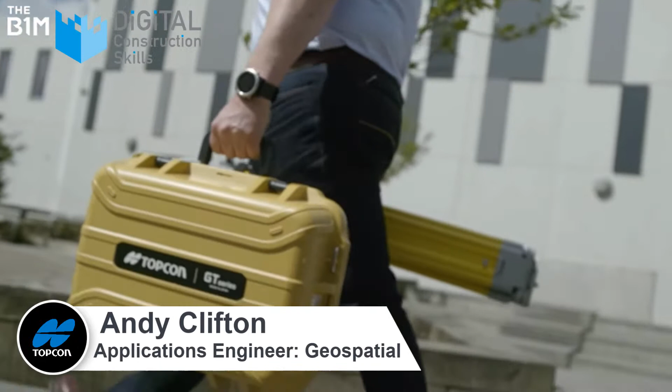Hi, my name is Andy Clifton and I work as an applications engineer for Topcon Positioning in the UK, and I'd like to talk with you today about digital transformation in construction.

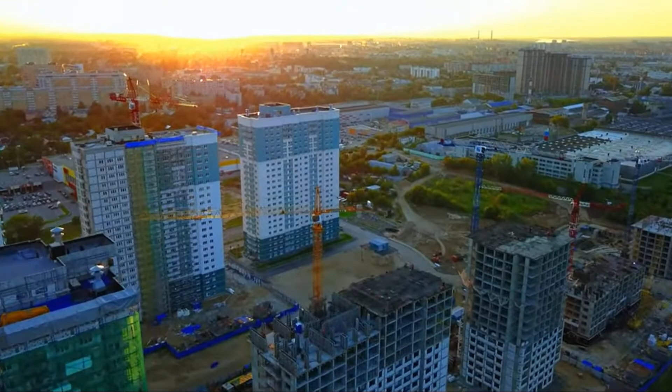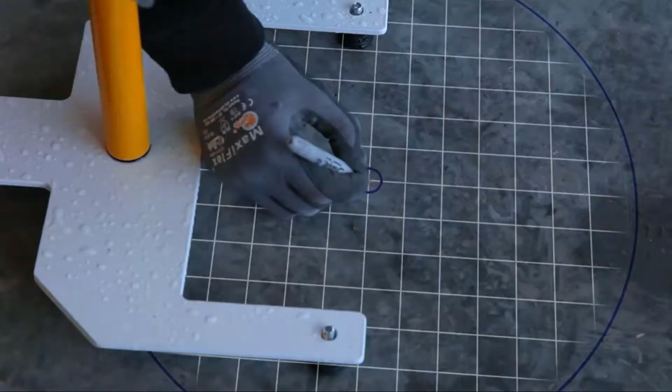Now, for construction, in the UK at least, change and the acceptance of new technology has been lamentably slow. And when you take a look, there are probably several reasons for this. We've got very competitive contracting timescales, leaving no time to experiment with new techniques and new technologies. We've got traditional practices based on abstracting information from paper plans, and a reliance on these traditional techniques. It's a case of it's always been done this way.

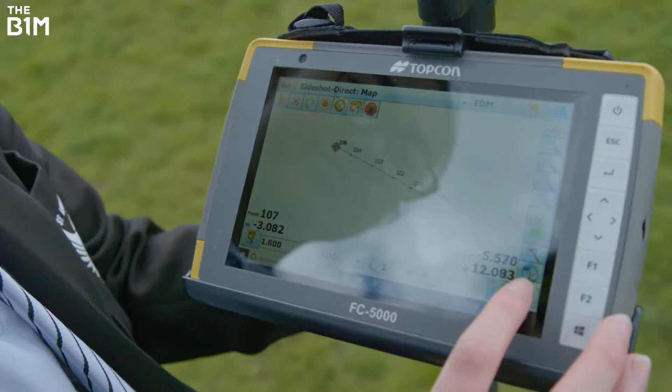We still use manual practices for material estimation. We've got budget restrictions in education, preventing colleges and universities from promoting the latest technology and instruments and techniques. And there's many more reasons too.

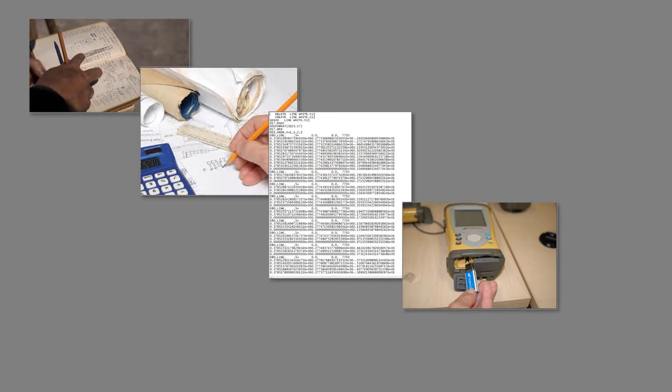But the net effect is that setting out for construction is very labour intensive and error prone, with information often passing through multiple hands before it's even acted on. And then, more often than not, it's found that this information has been surpassed by a more recent revision. And commonly, all of this information is still just a paper drawing or a list of coordinates.

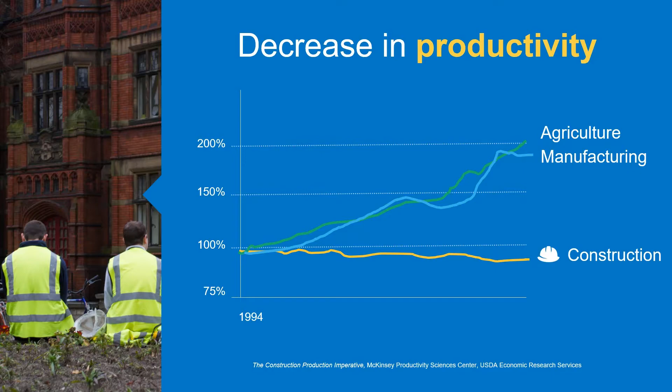Now, when we take all of these factors, this gives construction an overall decrease in productivity, especially when we compare it to other sectors that have really embraced digital technology, cloud services and automation. But we can already deliver and utilise this technology. Modern instrumentation and software, coupled with internet connectivity, can vastly improve the flow of data, allowing information to be sent directly from the office to multiple instruments and users, preserving accuracy and allowing revisions to be sent to the site as soon as they're approved.

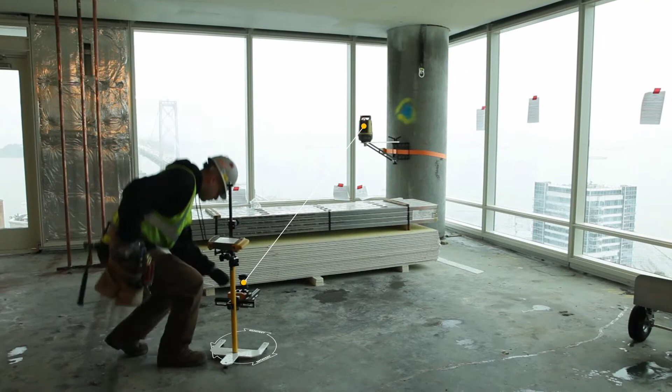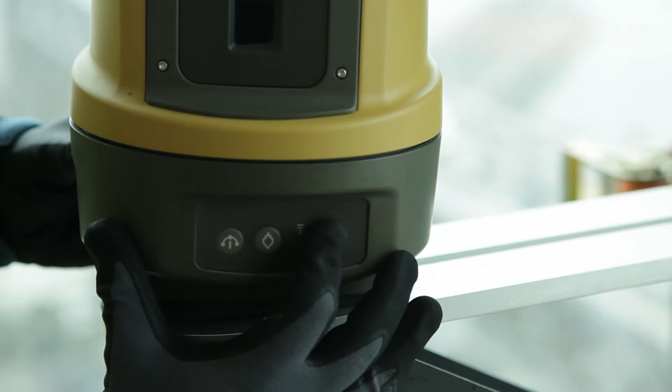As far as instrumentation goes, we're trying to allow ease of use by offering technology such as self-leveling total stations, which don't have eyepieces or leveling screws. So in the past there was a certain art to observing, but now with the instrument setup, everything's done on the pole. It's easy, it's quick, and it's accurate.

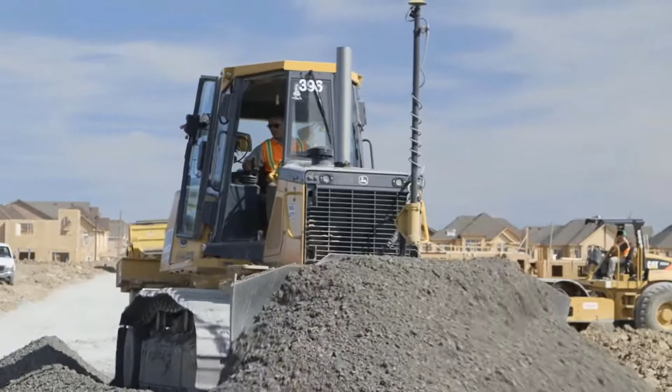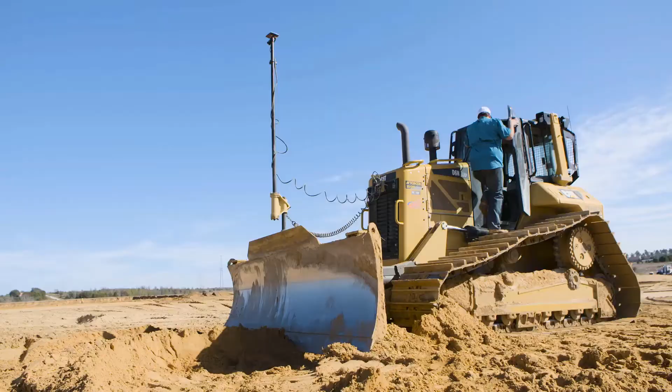But let's take things a step further as well, and let's look at machine control. The physical marking of points with pegs, boards and batter rails is a good example of how we've always strived to guide man and machine to lay, grade, cut and fill materials to a design. This is a very time consuming practice. And then what happens if the design changes or the markers are damaged? The engineering team will need to reinstate those markers before any works can recommence.

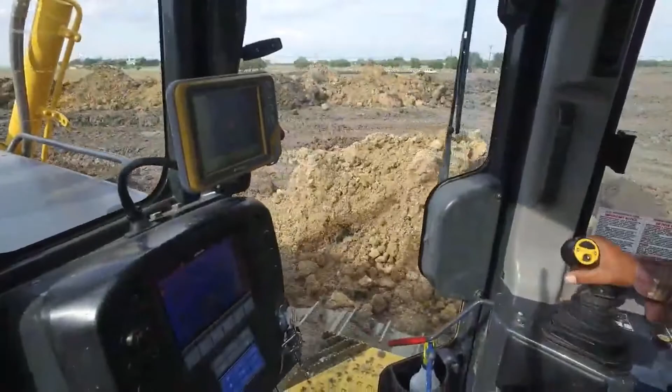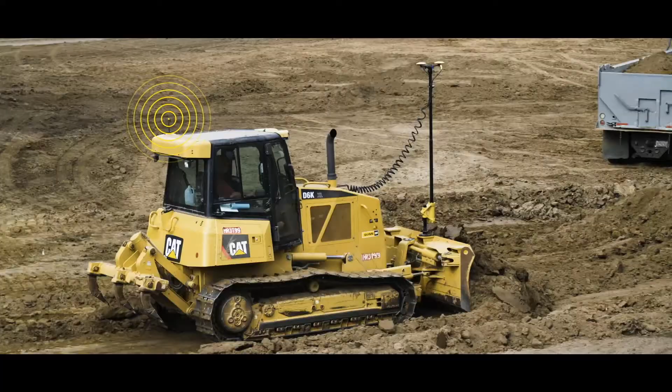So by creating a virtual 3D model of the design surface and placing this on the machine, the operator is able to determine how much he needs to cut or fill to get to the required design level. This empowers the operator by providing them with a 3D surface for the whole job site and not having to wait for the engineer to provide further setting out before they continue.

And if you add telematics to this scenario as well, the operator not only has the setting out information at their fingertips, but they can also receive updated designs as soon as they are issued, wherever they are on the site or even in the world. And in addition to receiving data, the operator can also record the as-built position of his bucket or blade. And this information can be sent back to the office as a measure of progress and a good estimate of the volumes of materials moved.

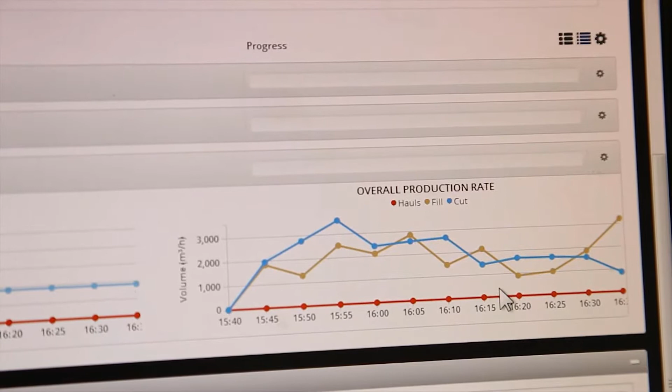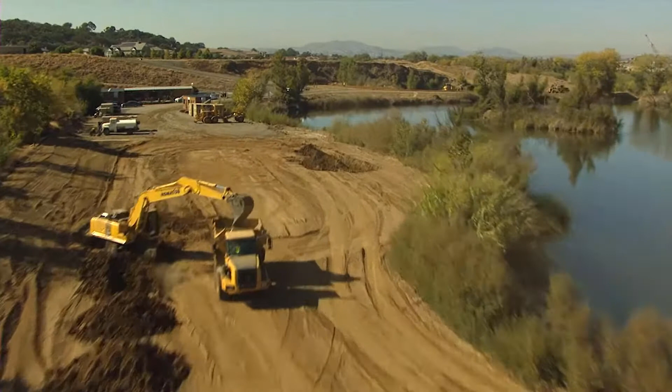Topcon's telematics system SiteLink allows the engineers to manage multiple machines on multiple sites, not just through data transfer, but with a real-time progress monitoring system built into the system. The engineering team can drive the display remotely and talk to the operators through any design changes.

But don't take my word for it. Here's the thoughts of the Skanska and Walters site teams who utilised Topcon digital technology on the A14 bypass project.

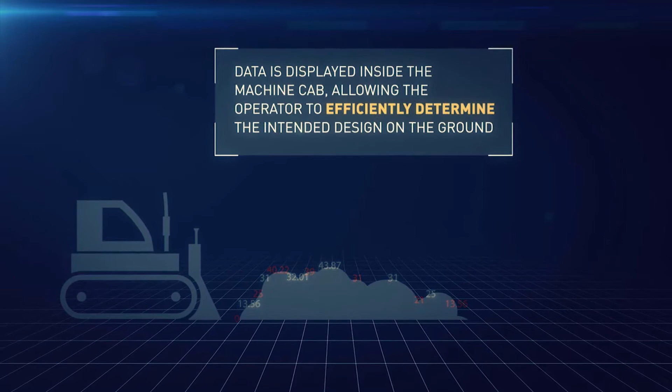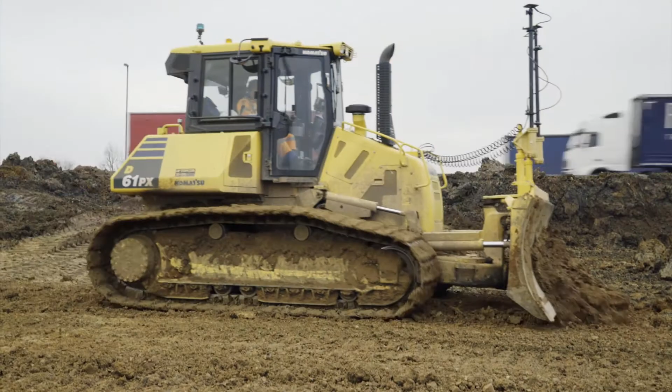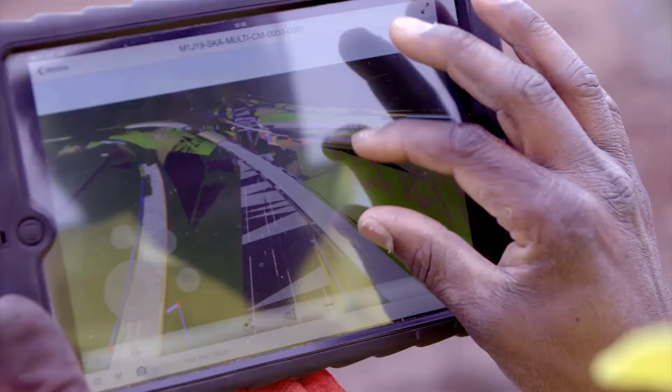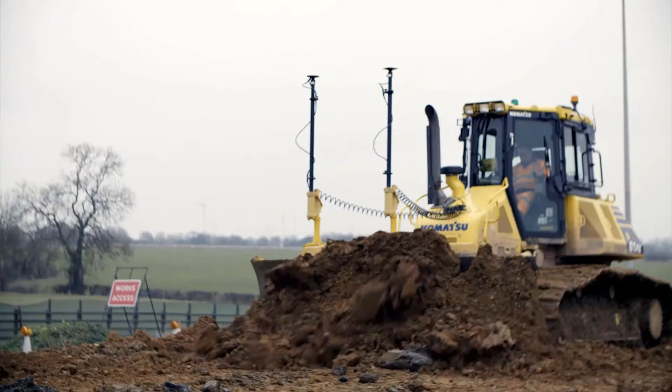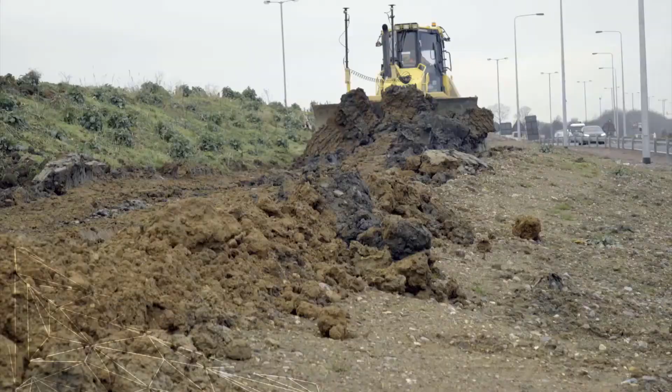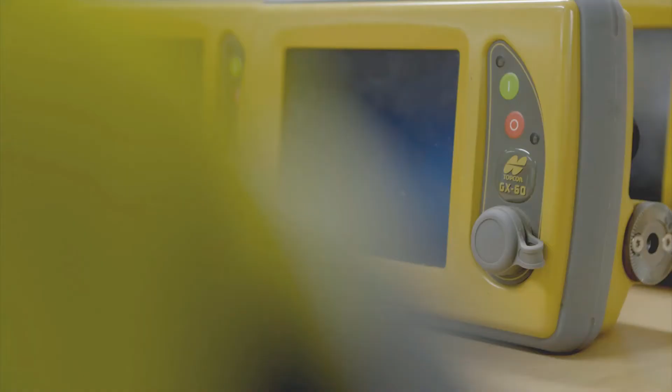I can't get a surface detail up, so I've messaged him back saying that there's a problem, I haven't got a surface detail. Then I get another map update with the surface detail in it, and that's fixed. That's a nice touch. I've been on machines 20, 25 years. I've used other systems before, and it was hard work to start with. But then I came across Topcon, and it became much easier.

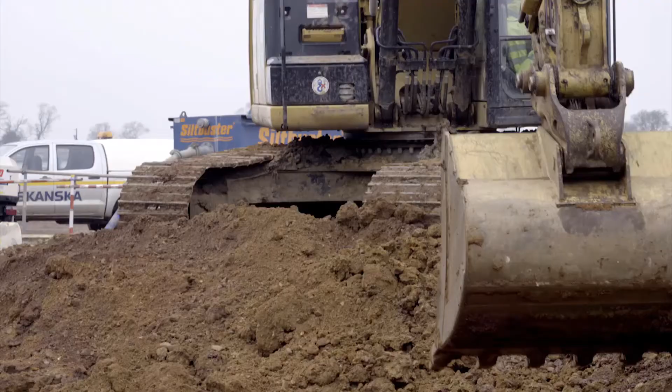By having a simple system, you will have efficient processes, and there's no adding on of extra work needed. It's just simple and efficient data workflows, and that's what Topcon's brought.

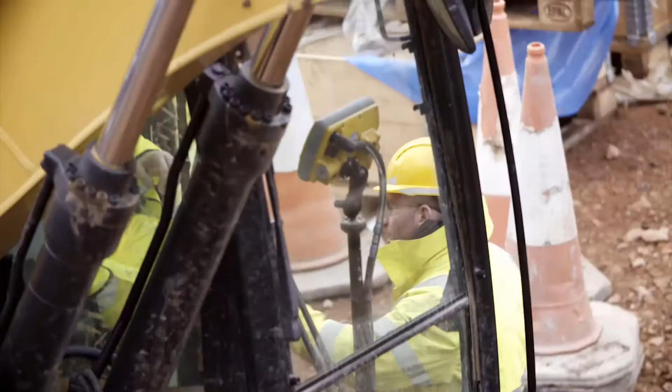It's taken labourers out of the way, it's taken chain boys out of the way. With this system, there's no need for them to be there. They can sit quite comfortably in an office and send me the files that I need. I don't need them around. It's a risk that Topcon has taken away. The materials that you use, the damage to the materials, the setting out errors, a lot of those are eradicated straight away.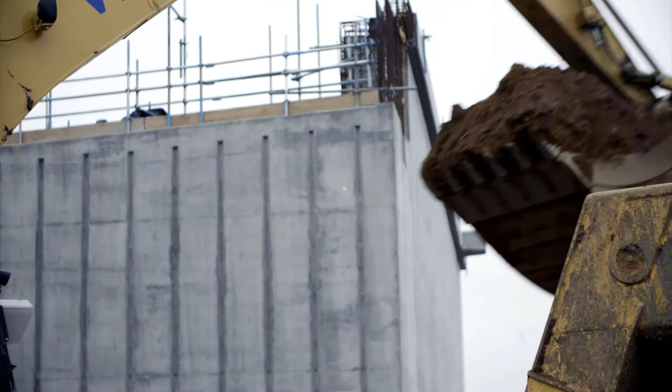I think SiteLink is a good choice because it's simple. It is very easy to pick up. You can pick it up within an hour. You don't need any fancy buttons. You get the information in, put in your digital terrain model, put in your line work, and put in your localization file, and just push it out to the machine. It's as simple as that.

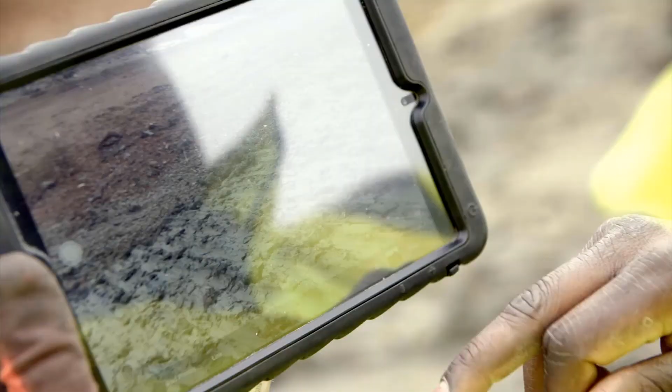There's an opportunity to say, let's lift the pilot mat or take the pilot mat or slacken the batters. That's an engineering operational decision that needs to be done quickly. Then we will go and use SiteLink, go back to the office, do the necessary checks and upload it in minutes. That's where SiteLink really pays dividends.